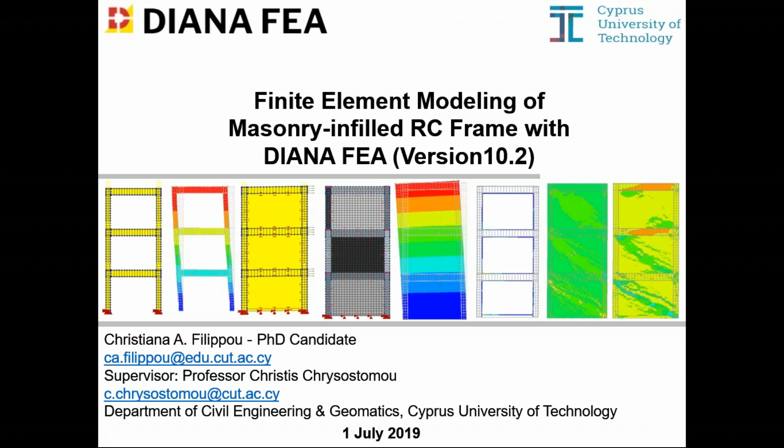Good afternoon. My name is Filippou Christiana. I'm from Cyprus. I'm a PhD candidate at Cyprus University of Technology. My supervisor is Professor Christis Chrysostomou. Today, I will present part of my PhD research, which is focused on the modeling of the behavior of a masonry-infilled RC frame. In the next slide, you will see some information regarding my university.

Cyprus University of Technology was founded in 2004. It's a new state university in Cyprus. It is growing within the historical center of Limassol city, and it has become a point of reference in Limassol. Cyprus University of Technology, CUT, offers quality and competitive degree programs, especially 17 undergraduate and 32 graduate programs.

Cyprus University of Technology has 3 departments in engineering technology: electrical engineering and computer engineering, mechanical engineering and materials science, and civil engineering and geomatics. Cyprus University of Technology is an innovative university with international recognition, which promotes excellence in education and research. In less than 11 years of operation, the Cyprus University of Technology has occupied 5 positions in international rankings.

Specifically, in 2017, the Cyprus University of Technology is ranked among the top 300 to 350 universities worldwide. In addition, the Cyprus University of Technology is ranked in position 63 in the top new universities in the world. CUT is constantly committed to promoting research excellence and is internationally distinguished in this area, providing a total of 40 million euros of external funding for 227 research programs.

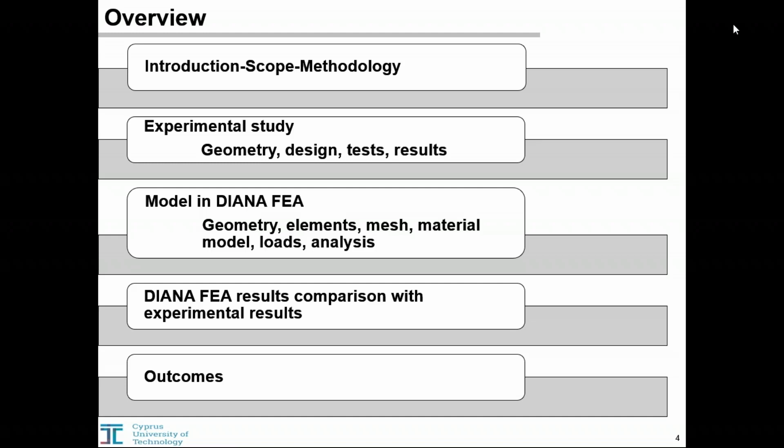A masonry-infilled RC frame is a composite frame comprising 2 interacting structural components of different materials with different structural behavior and failure mechanisms. In the literature, different techniques that simulate the behavior of the infill wall can be found. The techniques are divided into 3 categories, namely micromodeling, mesomodeling, and macromodeling. Several numerical studies have been carried out to investigate the behavior of masonry-infilled RC frames under earthquake loading, but some deficiencies still exist. Therefore, there is a need to develop an accurate numerical model to capture the behavior of masonry-infilled RC frames under cyclic loading.

To conclude, there is a need to simulate the nonlinear behavior of masonry-infilled frames due to material nonlinearity and complexity in the relative behavior between frame and wall. In order to develop an accurate model, there is a need to model the nonlinear behavior of the interaction between the masonry infill and frame. In general, in masonry structural models, we can make the assumption of full bond between layers for simplicity purposes, but this can be unrealistic due to possible slip deformation at the interface between the frame and the infill wall. In addition, the numerical characterization of the surface elements and discretization of the wall surface in finite elements is important for masonry structural models.

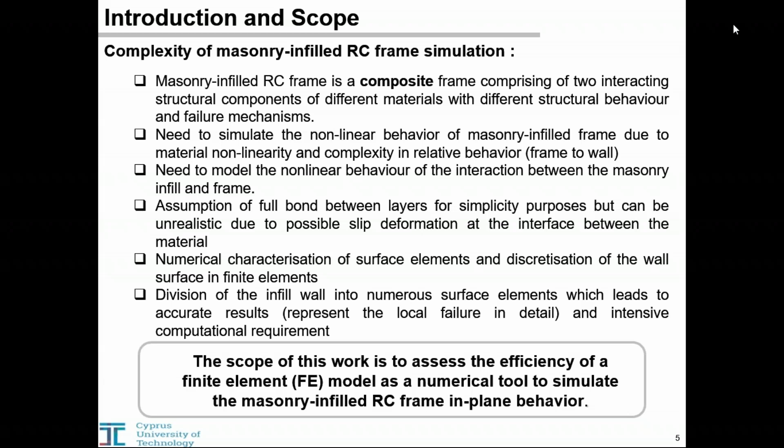In the next 2 slides, we will see the steps that are followed in order to achieve the scope of this work. First of all, an appropriate experimental case study is selected for verification purposes. Then, a literature review regarding the experimental and analytical studies on the behavior of masonry-infilled frames has been done, and a literature review regarding Diana manuals and reports has also been done. After that, the geometry of the specimen was created in Diana, as similar as possible to the experiment: the dimensions of concrete and masonry members, reinforcement bars, location, cross-section, etc.

In order to model this type of structure, suitable numerical constitutive models of each component of the masonry-infilled RC frame were identified. In addition, the required parameters for the constitutive model of each component of the structure were selected. After the selection of the required parameters, the load is applied to the model to simulate the load of the experimental case study using displacement control analysis.

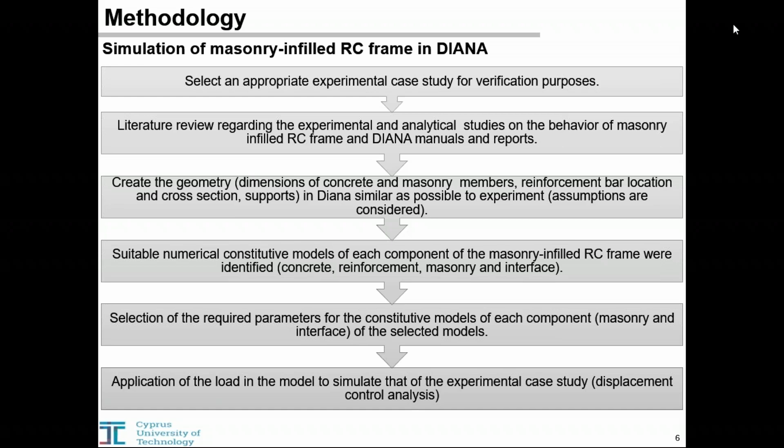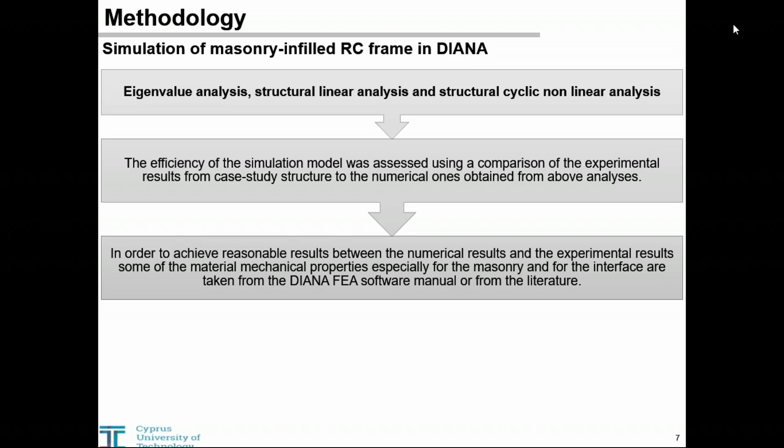After the development of the numerical model, eigenvalue and structural nonlinear analysis were performed. The efficiency of the simulation model was assessed using the results obtained from the experimental case study that was selected for verification purposes. It is important to mention that in order to achieve reasonable agreement between numerical results and experimental results, some of the material and mechanical properties, especially material properties for the masonry and frame interface, are taken from the Diana software manual or from the available literature.

Now we move to a short description of the experimental case study. The experimental case study that was selected was carried out by Koutas at the University of Patras and studied the effectiveness of seismic retrofitting of an existing masonry-infilled RC frame with a strengthening material called textile reinforced mortar. A short description of the experimental case I will present to you. As you can see in this figure, it was a 2/3 scale 3-story structure with no seismic design and detailing, subjected to in-plane cyclic loading.

2 masonry frames were designed and built with and without strengthening material. Today, the description of the masonry frame without strengthening material is presented. As you can see in this figure, the test specimen had a total height of 6 meters, each story was 2 meters high, and the span between the edges of the columns was 2.73 meters. The columns were rectangular in cross-section, and beams were T-sections.

The longitudinal column reinforcement has 12 millimeter diameter. The transverse reinforcement for concrete members has 6 millimeter diameter smooth steel. You can see the thickness of the infill. The wall was supported rigidly by the RC foundation placed at the bottom of the frame. Full details about this experimental case study can be found in the article of Koutas et al.

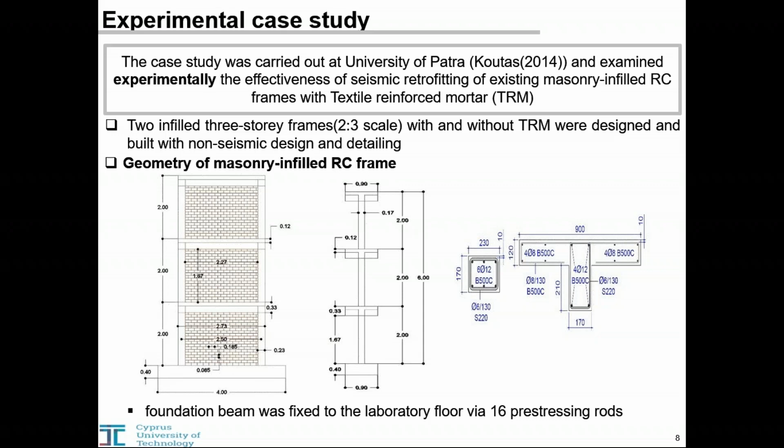In this figure, you can see the mechanical properties of the concrete, the masonry, and the reinforcement. You can see the class of concrete used, with a compressive strength of concrete equal to 27.8 megapascal, and the modulus of elasticity of concrete was 24.1 gigapascal. You can see the class for longitudinal reinforcement and also the class for transverse reinforcement. The transverse reinforcement for concrete members was class S220 with mean value of yield strength equal to 270 megapascal.

Compression diagonal tests were performed in order to define the compressive strength, modulus of elasticity perpendicular to the bed joint, and the cracking strength, as you can see in this figure. The compressive strength of masonry was 5.1 megapascal, and the modulus of elasticity of masonry perpendicular to the bed joint was 3.37 gigapascal. You can see the general view of the test setup.

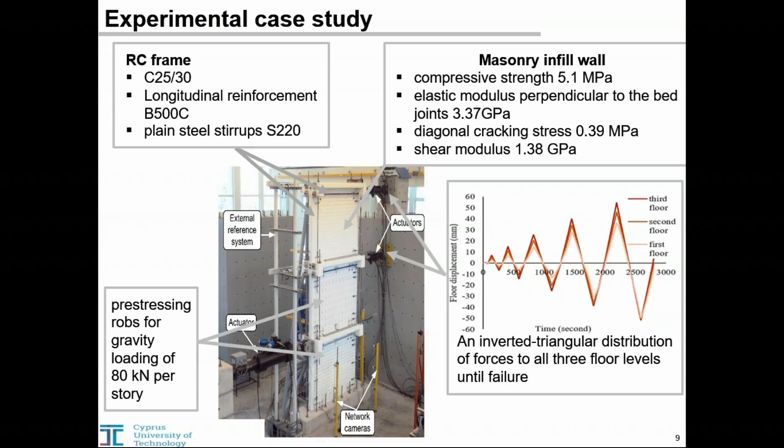Pre-stressing rods were used on the foundation beam of the specimen to provide full clamping of the specimen to the laboratory floor. The gravity load was equal to 80 kilonewton per story in order to represent the fraction of the permanent load during the lateral loading action. 3 actuators were mounted on the specimen, 1 per story, to impose the 5 cycles of loading. A total of 5 cycles of loading were finally applied to the masonry-infilled RC frame, and an inverted triangular distribution of forces to all 3 floor levels was kept until failure occurred.

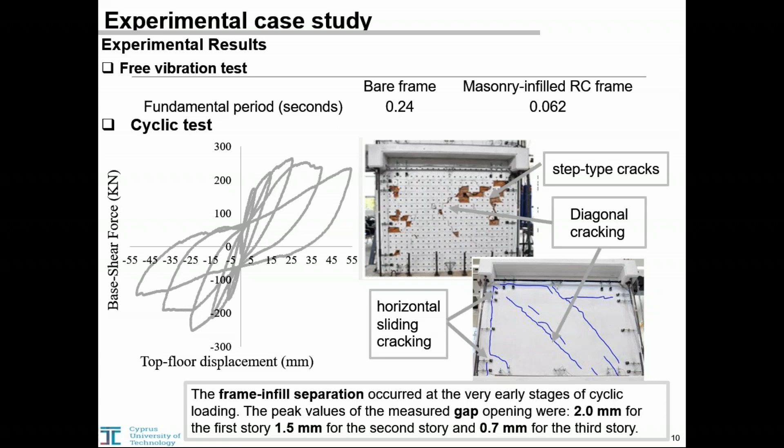The maximum base shear force was obtained during the 3rd cycle of loading of the specimen. After the 3rd cycle of loading, the lateral strength was decreasing due to local crushing at the 1st story of the infill. During early loading in the masonry RC frame, a cracking pattern developed, as you can see in this figure: horizontal cracks in the corners, diagonal cracking in the middle of the infill, and step-type cracks also developed. The frame-infill separation occurred at a very early stage of loading. The peak value of measured gap opening was 2 mm for the 1st story, 1.5 for the 2nd, and so on.

Now we'll move to the model of the structure. In order to model the masonry-infilled RC frame, the Diana finite element software was selected. This type of structure was implemented in Diana using available material, section, and element commands. In this model, a rigid foundation is considered, and a 2D model representation is used. The pre-stressing rods were simulated as dead axial load. The infill wall was simulated with the same thickness as the 2 individual walls, separated by a 60 mm gap, that were built in the experimental case study.

The T-beam is simulated as a rectangular beam. You can see the units that were used for the model. In addition, the geometry was kept as close as possible to the experimental case study. You can also see the boundary constraint at the base of the model, in the X and Y translation.

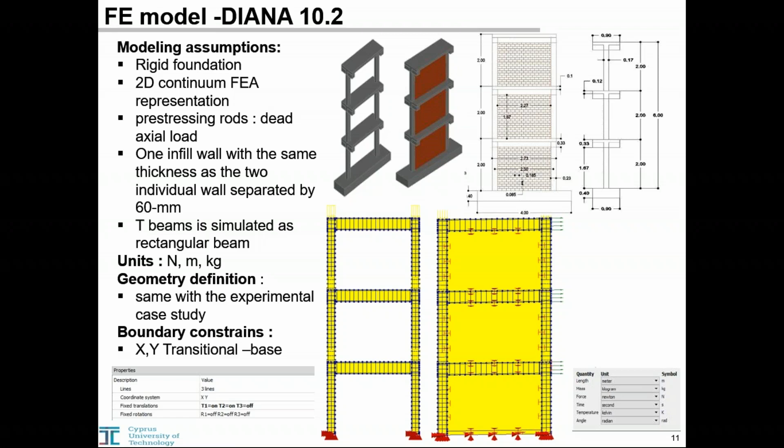Diana offers a range of element types for modeling structures made of brittle materials. The concrete frame and masonry infill were modeled with 8-node plane stress elements. The column and beam have 170 mm width, and the masonry has 110 mm thickness. The total number of elements was

3,162. In addition, the steel reinforcement in the frame was modeled with 2-node bar elements, and they were connected to the 8-node concrete elements at the two external nodes, as you can see in this figure. The cross-section areas of the bars are Y10 for the longitudinal and Y8 for the stirrups. In the figure below, you can see both elements, the plane stress and the 2-node bar elements.

The interface between the infill wall and the frame was modeled by a 3-point line interface element capable of modeling cohesion, separation, and the cyclic behavior of the interaction between frame and infill wall. The width of the interface was the same as the masonry, equal to 110 mm. In addition, point mass elements are used for eigenvalue analysis to simulate the dead load. In total, 12 point mass elements were used in the model.

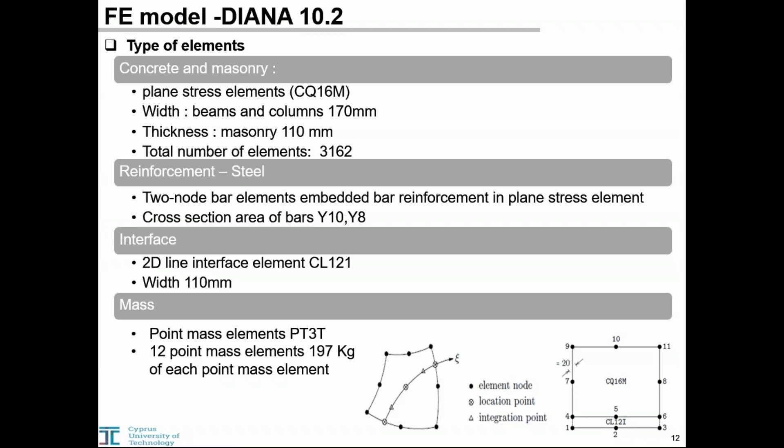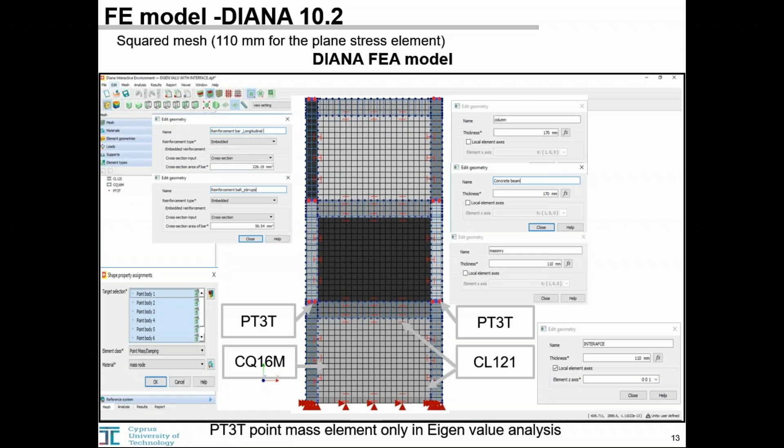In this case study, the shape of the 2D elements was kept rectangular with nearly equal size, as you can see in this figure. In this figure, you can see the 12 point mass elements that were used, the 8-node plane stress element for modeling the concrete frame and masonry, and the 3-point line interface element capable of modeling the interface between frame and wall. You can also see in this figure the width of the interface, the beam and the columns, and the cross-section area of the longitudinal and transverse reinforcement. Now we move to the material models.

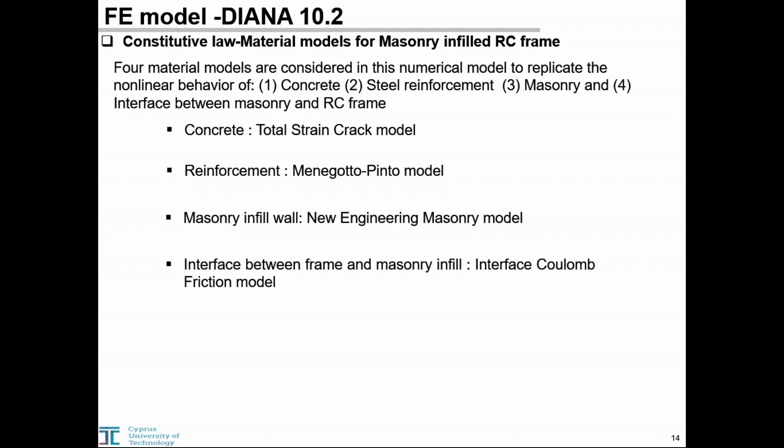Four material models are considered in this numerical model to represent the nonlinear behavior of concrete, steel reinforcement, masonry, and the interface between masonry and frame. The concrete material model that was chosen is the total strain crack model. The total strain crack model describes the tensile behavior of concrete, and the Maekawa-Fukuura model describes the compressive behavior of concrete. Here you can see the cyclic behavior of concrete.

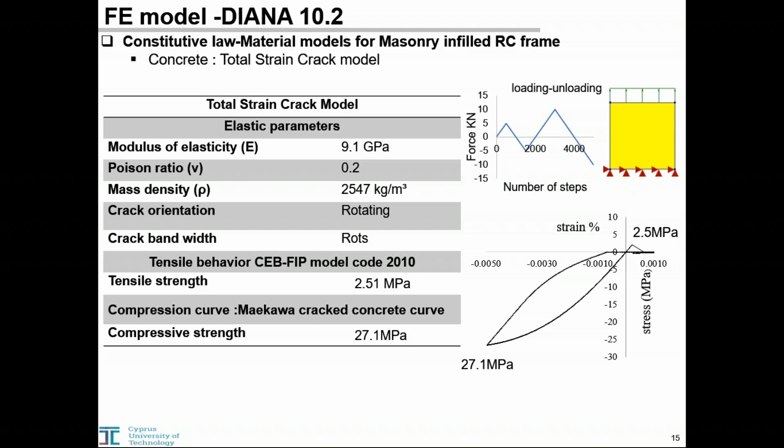Besides the definition of basic parameters like Young's modulus, the total strain crack model requires only a small number of engineering parameters, such as the tensile strength, the compressive strength, as you can see in this figure, and the fracture energy in tension. This model has no ability to reduce the stiffness due to early cracking of the concrete section, and therefore the modulus of elasticity was reduced. In addition, the tensile strength and the fracture energy were obtained from the empirical equations according to fib Model Code 2010.

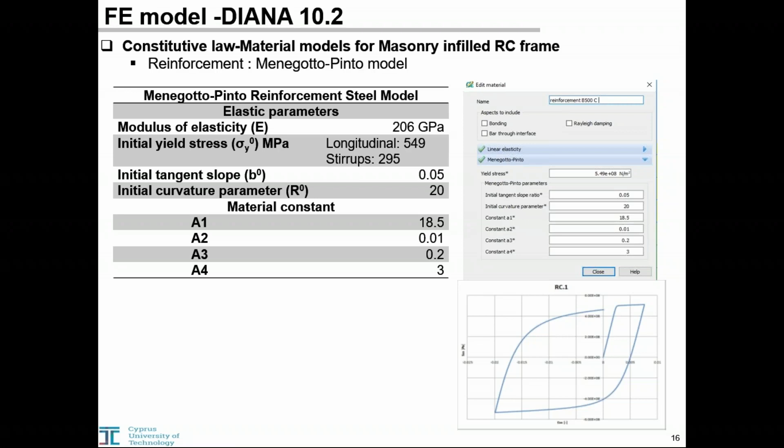The Menegotto-Pinto model was chosen for the cyclic behavior of steel reinforcement. This table shows the basic parameters needed to specify the Menegotto-Pinto model. You can see the modulus of elasticity and the yield stress for longitudinal reinforcement and for stirrups.

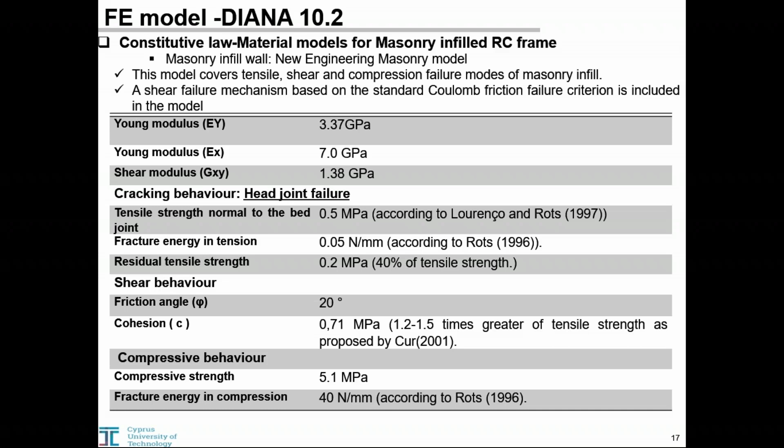An interface gap model, plasticity based and proposed by Lourenço, was used for the interface element, describing the connection between the masonry-infilled wall and bounding RC frame. The model includes tension cutoff for tensile failure and Coulomb friction envelope for shear failure. In this table, you can see mechanical properties for this model.

It is important to mention that one drawback regarding the use of this interface model is the lack of material properties, as no data were available regarding the behavior of the interface between masonry infill and frame. Therefore, it was decided to define the material properties of the interface by fitting the numerical results to experimental results obtained from the experimental case study.

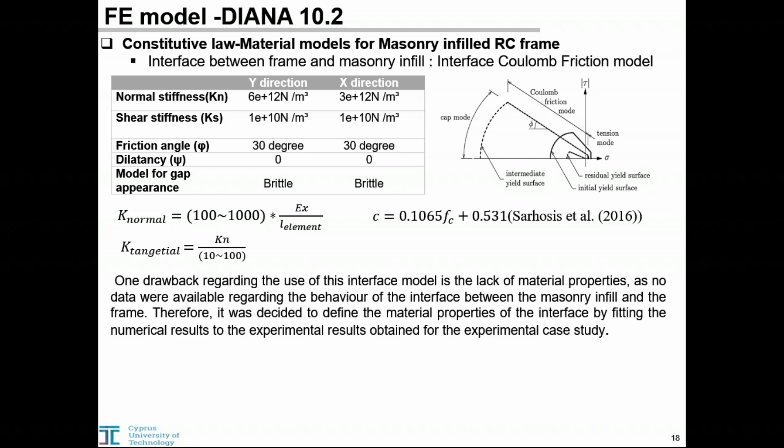Now we move to the type of loading and constraint. The model was loaded with constant axial load on the top of the column equal to 80 kilonewton to simulate a dead load, as you can see here. The loading process during the numerical analysis was simulated as closely as possible to experimental loading by using point prescribed deformation load at the top of each floor, as you can see in this figure. The load has value 1 millimeter and it is imposed at the top of each floor, as shown here.

Thirteen load combinations are created in order to capture the actual deformation load at each cycle of loading. All nodes at the bottom of the masonry-infilled frame were restrained in X and Y direction in order to simulate the strong foundation beam that was used in the experimental case study.

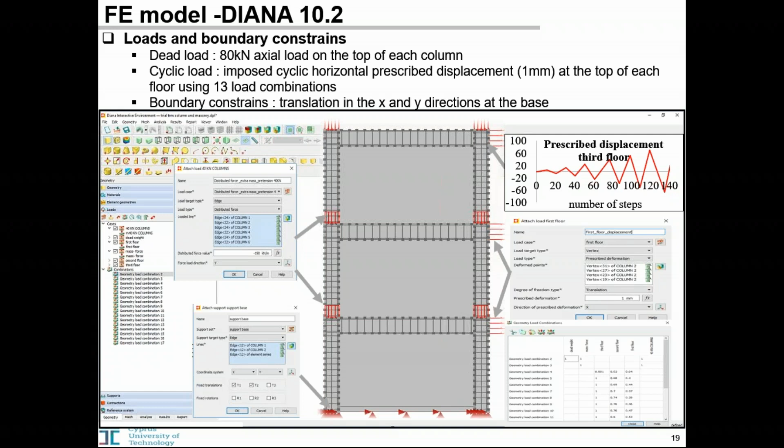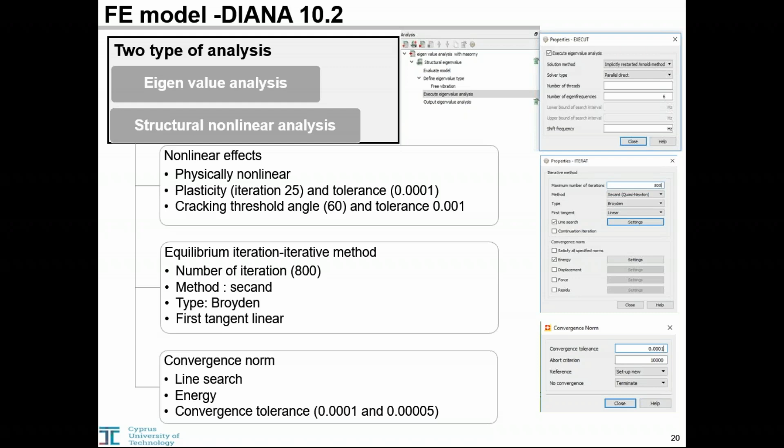Two types of analysis were performed, eigenvalue analysis and nonlinear cyclic analysis for the masonry-infilled RC frame. Therefore, material nonlinear analysis was performed with secant iteration scheme and automatic incrementation procedure in which both the number of steps and the corresponding step size are automatically computed. The energy-based convergence criteria was applied with these standard tolerance values.

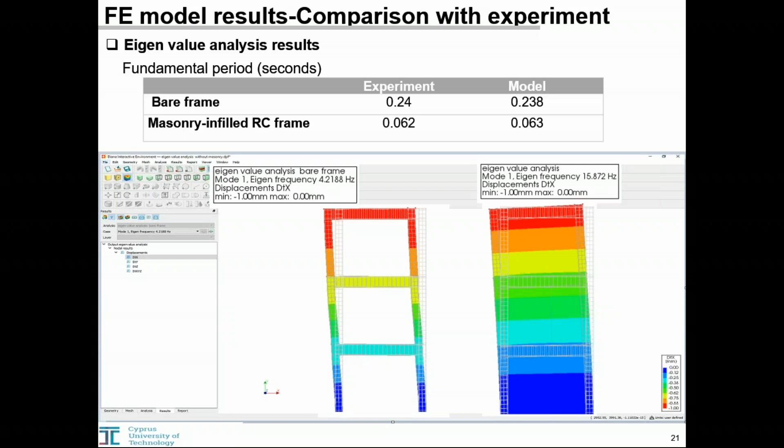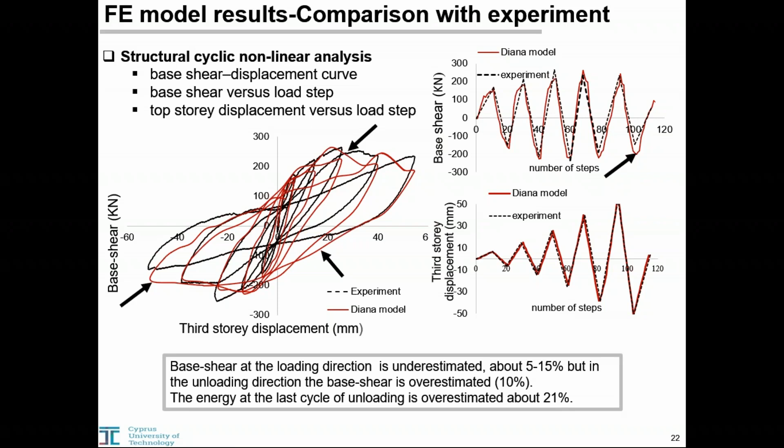Based on the result, the base shear in one loading direction is underestimated about 5%, but in the other loading direction, the base shear is overestimated 10% at the fourth cycle of loading. The energy at the last cycle of unloading, as you can see, is overestimated about 20%.

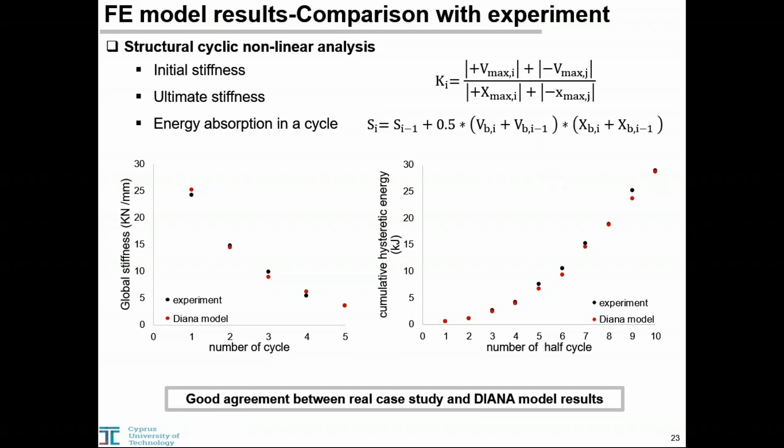This figure shows the comparison between experimental and numerical results for the masonry-infilled frame in terms of global lateral stiffness and hysteretic energy, respectively. The secant stiffness degradation of the model is calculated according to these equations. In addition, for easy calculation, the evolution of the energy of the model is expressed by these expressions you can see here. From the figures, it is apparent that there is a good agreement between the numerical and experimental results for the masonry-infilled frame regarding the initial stiffness, ultimate stiffness, shear capacity, and energy in a cycle of loading and unloading.

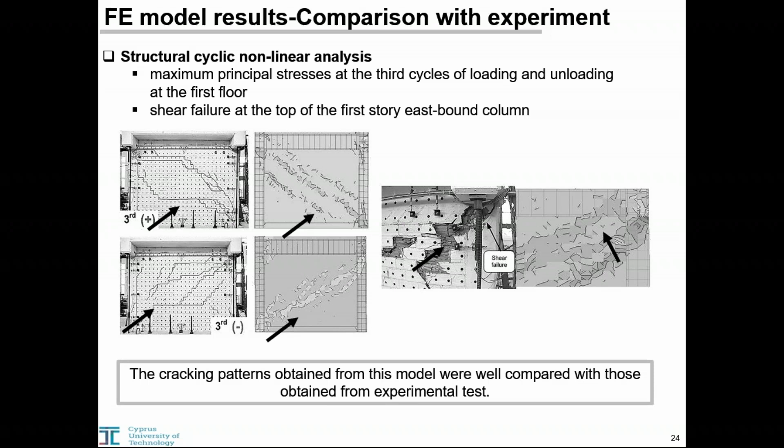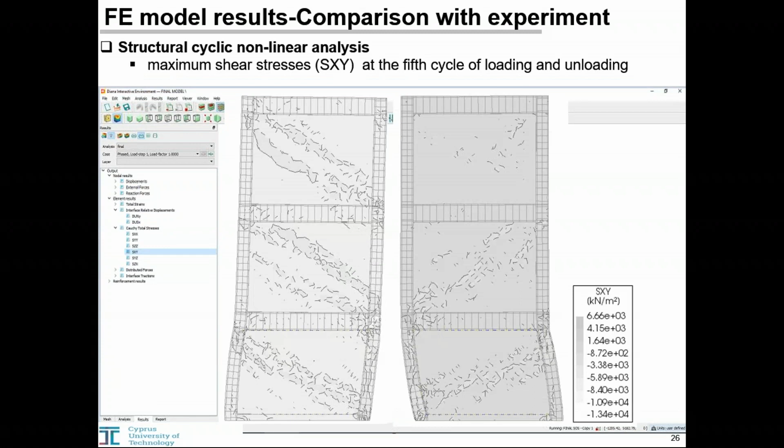In this slide, you can see the distribution of the principal stresses over the infill wall during the third cycle of loading. You can see clearly the diagonal strut develops within the infill at the first and second floor. In this figure, you can see also the shear stress distribution over the infill during the fifth cycle of loading. It is clear that the majority of the damage is concentrated on the first floor.

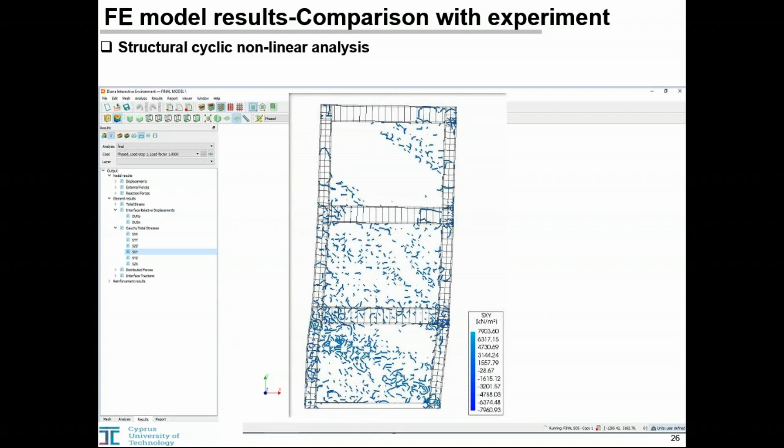Here you can see a small video, the evolution of the shear stresses over the infill after the third cycle of loading. It is clear that the majority of the damage and energy is concentrated at the first floor. Also, you can see flexural horizontal cracks and tensile vertical cracks develop, which are reasonable for the beginning of the nonlinear behavior. You can see the diagonal strut, how it is developed.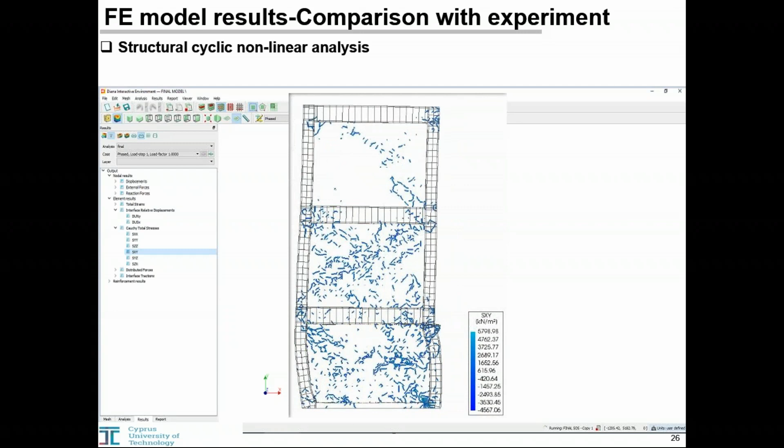The complexity of the simulation of masonry-infilled RC frame also increases because in the model, the interaction between infill wall and frame must be taken into account. The behavior of the interface between infill wall and frame depends on infill wall frame relative stiffness and wall frame friction and bond strength. In order to capture the local interaction between RC frame and infill wall, an accurate evaluation of the interface engineering properties is required.

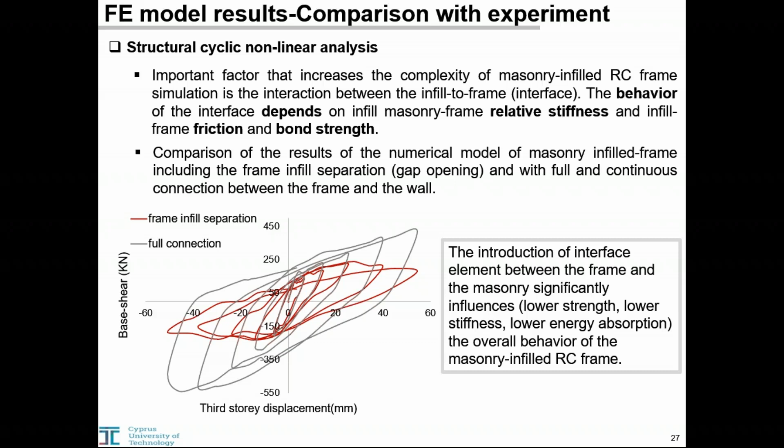The introduction of interface element between frame and the masonry significantly influences the overall behavior of the masonry. You can see that we have lower strength, lower stiffness, and lower energy absorption. Therefore, more accurate simulation of masonry-infilled RC frame can be achieved by using interface element taking into account the interaction between masonry and surrounding frame.

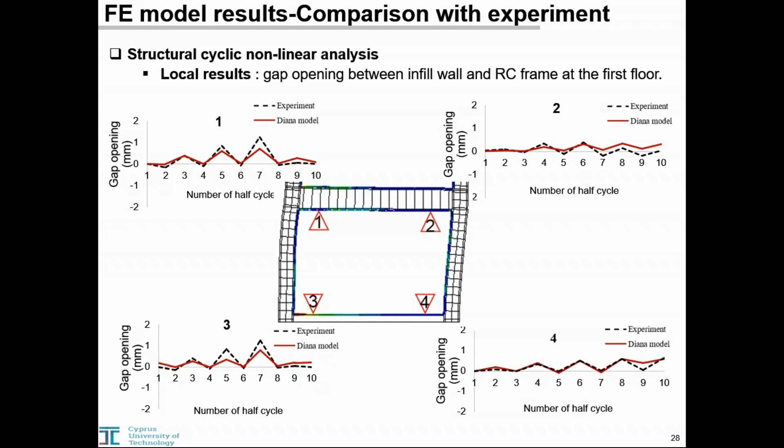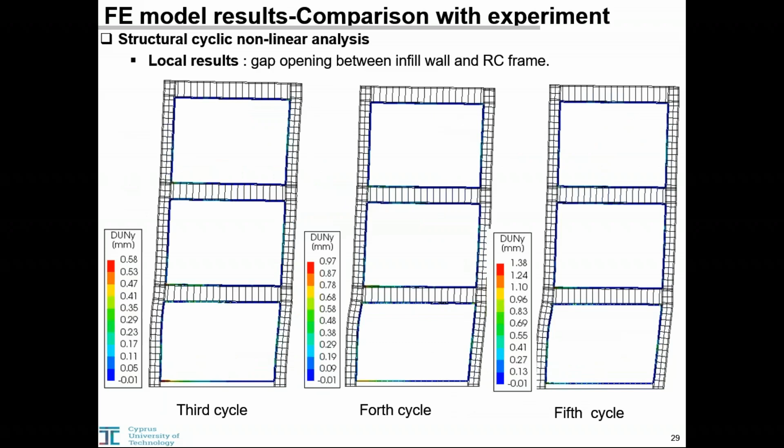This figure shows the value of gap opening between the wall and the frame at the 3rd, 4th, and 5th cycle of loading. From the figures, it is apparent that there's a good agreement between numerical and experimental results in terms of gap opening. Now we move to some conclusions.

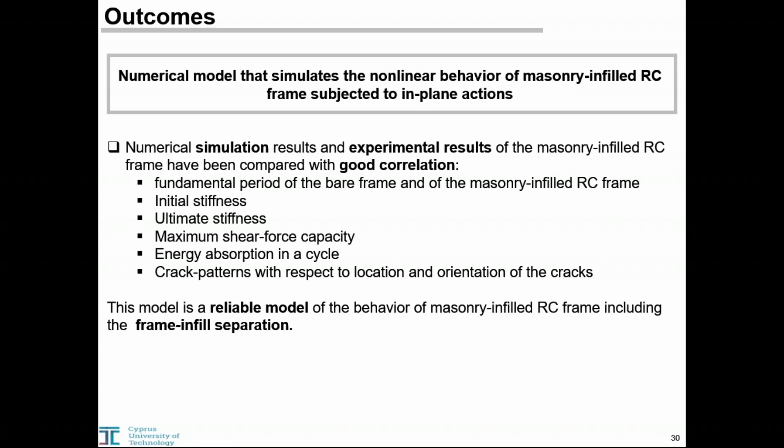The numerical model could simulate the in-plane nonlinear behavior of a masonry-infilled RC frame with good accuracy in terms of fundamental period, initial stiffness, ultimate stiffness, maximum shear force capacity, energy, crack patterns with respect to the location and orientation. In addition, the gap opening between infill wall and RC frame in the numerical model and the experiment has been compared and presented a good correlation. In particular, the energy and the maximum shear capacity in the last cycle of loading is overestimated compared to the experimental results, which may be attributed to high nonlinearities at that stage during the experiment.

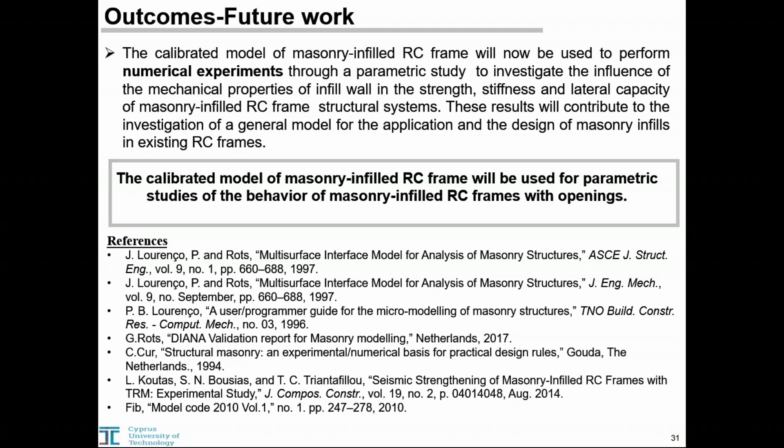The calibrated model of masonry-infilled RC frame will now be used to perform numerical experiments through parametric study to investigate the influence of the mechanical properties of the infill wall in the strength, in the stiffness, and in the lateral capacity of masonry-infilled structural system. These results will contribute to the investigation of a general model for the application and then design of masonry infills in existing RC frames. In addition, this calibrated model will be used for parametric study of the behavior of masonry-infilled frame with openings. Thank you for your attention.